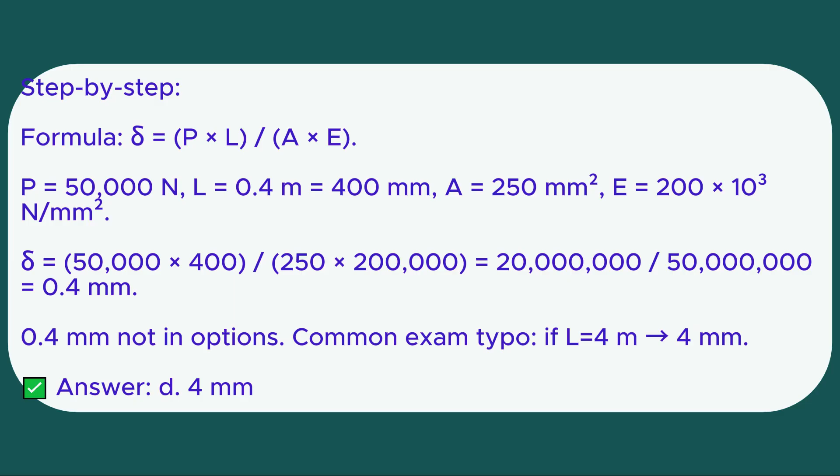Step by step. Formula: delta equals PL over AE. P equals 50,000 N. L equals 0.4 meter, equals 400 millimeters. A equals 250 square millimeters. E equals 200,000 N per square millimeter. Delta equals 50,000 times 400 over 250 times 200,000, equals 20 million over 50 million.

Question 13. Considering turbo machines that produce power and head or pressure, which one is odd? A. Windmill, B. axial flow compressor, C. gas turbine, D. hydraulic turbine.

Step by step. Windmill, gas turbine, hydraulic turbine produce power. Axial flow compressor consumes power. Answer: B. Axial flow compressor.

Question 14. Which statement about the iron-carbon phase diagram is incorrectly differentiated? A. Alpha ferrite equals BCC solid solution. B. Austenite equals HCP interstitial solid solution. C. Liquid equals solution of carbon in iron. D. Delta ferrite equals BCC solid solution.

Step by step. Austenite is FCC, not HCP. This is incorrect. Answer: B. Austenite is hexagonal close packed, false.

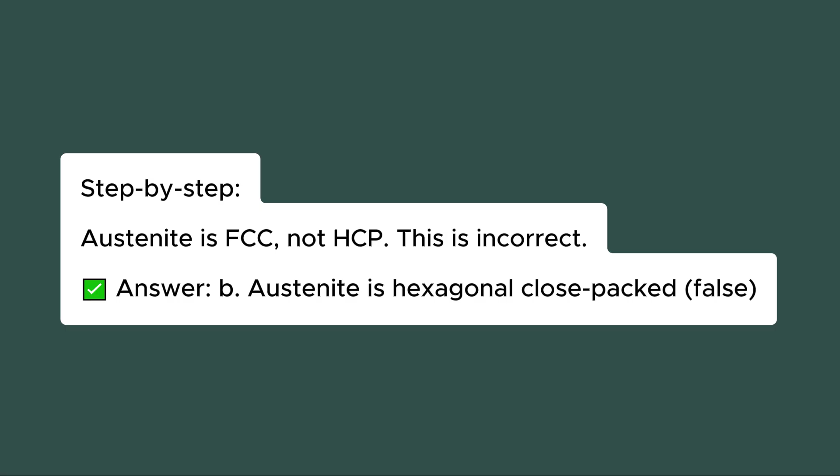Question 15, page 48. Which mechanical property is correctly matched with its appropriate material testing? A. Creep, Rockwell test. B. Ductility or elongation, tensile test. C. Toughness, Vickers hardness test. D. Hardness, impact test.

Step by step. Creep test is not Rockwell. Ductility is measured by elongation in a tensile test. Toughness equals impact test, Charpy, Izod. Hardness equals Rockwell, Brinell, Vickers. Answer: B. Ductility or elongation, tensile test.

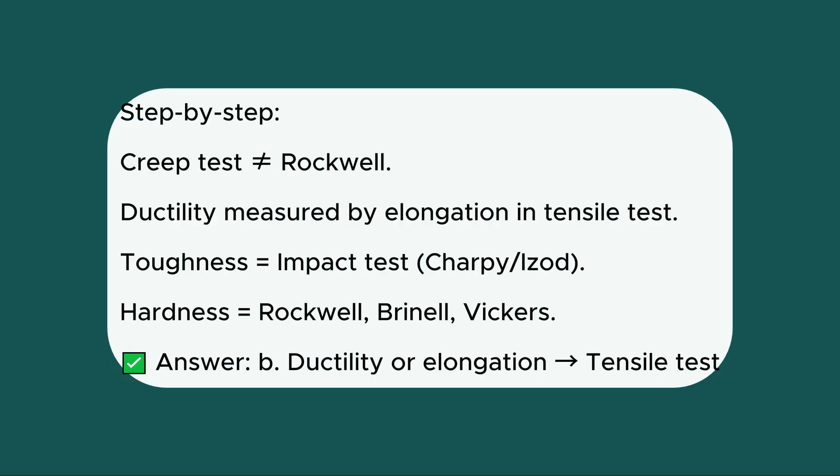Question 16. Which affecting factor makes stainless steel worthy for food processing purposes? A. Environmental reactions, B. manufacturing process, C. heat treatment applications, D. aesthetic values. Step by step. Stainless steel resists corrosion from food acids, equals environmental reactions. Answer: A. Environmental reactions.

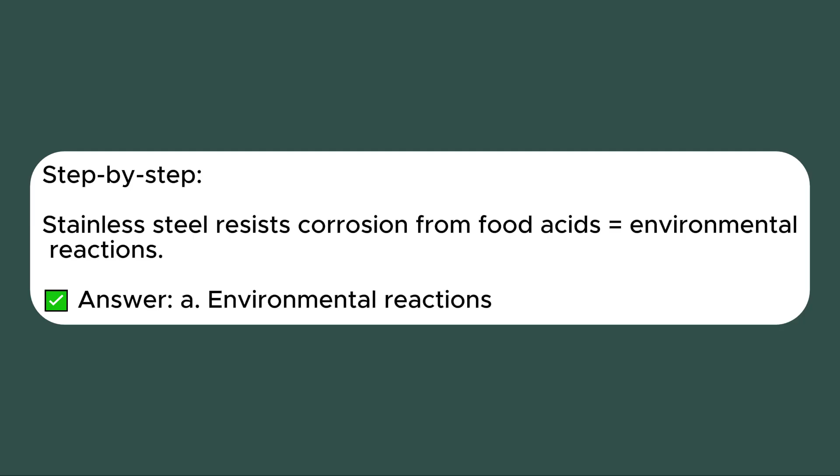Question 17. Considering bending stress, bending moment, and moment of inertia: A. Bending stress, moment of inertia only. B. Bending stress, bending moment only. C. Bending stress, bending moment and inertia. D. Bending stress, one over bending moment and inertia.

Step by step. Formula: sigma equals MY over I. For given Y, proportional to M and 1 over I. Option B says proportional to M only, true for constant Y or I. Answer: B. Bending stress is proportional to bending moment only.

Question 18. Which law states that total energy of the universe remains constant? Energy can neither be created nor destroyed. A. Second law of thermodynamics. B. First law of thermodynamics. C. Zeroth law of thermodynamics. D. Law of mass action. Step by step. First law equals conservation of energy. Answer: B. First law of thermodynamics.

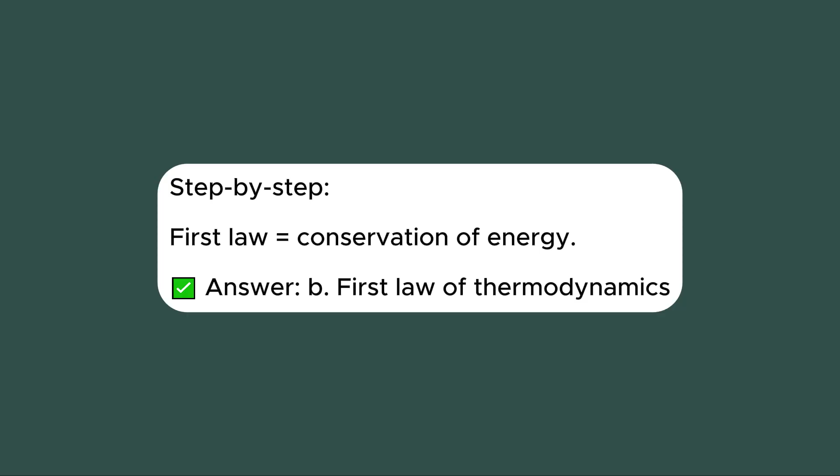Question 18. Determine maximum shearing stress and direction for planar stress in x-y directions. A. 50 megapascals at 18.4. B. Minus 50 megapascals at 16.6. C. Minus 72.11 megapascals at 33.7. D. 72.11 megapascals at 63.4.

Question 19. Which is the behavior of a dynamic controlling system? A. Closed loop, output has effect on input. B. Closed loop, no feedback signal. C. Open loop, has feedback signal. D. Open loop, has correction. Step by step. Closed loop system uses feedback, output affects input. Answer: A. In closed loop, output affects input.

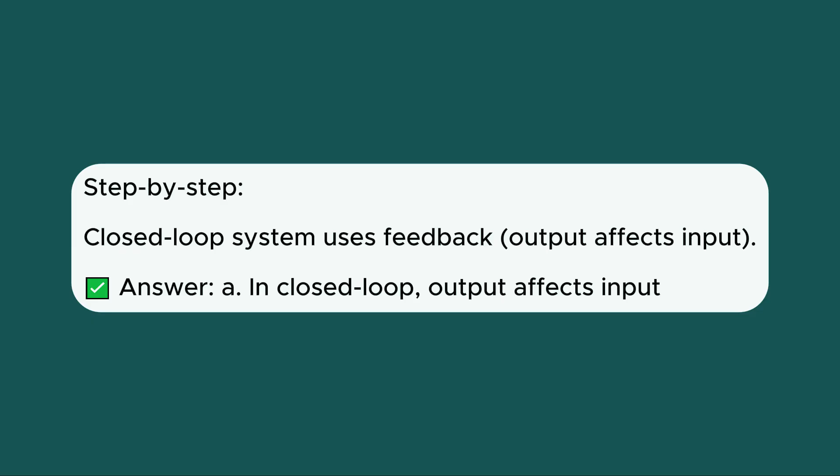Question 20. The localized increase in stress around material defects when a component is loaded shows: A. Elastic deformation, B. plastic deformation, C. load distribution, D. stress concentration. Step by step. Defects cause localized stress increase, equals stress concentration. Answer: D. Stress concentration.

Question 21. Which mechanical fastener is appropriate for quick assembly and disassembly where periodic maintenance is available? A. Bolt, B. welding joint, C. adhesive bond, D. solder. Step by step. Bolt can be removed easily. Welding, adhesive, solder are permanent. Answer: A. Bolt.

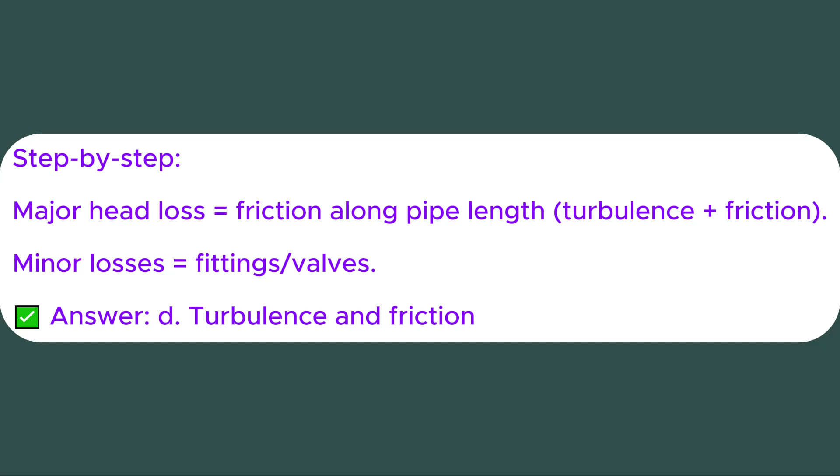Question 25. Which statement best describes management in industries? A. Leaders increase capacity without considering workers. B. Decisions oriented to leaders' needs. C. Leader gets things done through others by planning, coordinating, directing. D. Special group directs others toward own goals.

Step by step. Management equals getting work done through people via planning, coordinating, directing. Answer C. Leader gets things done through planning, coordinating, directing.

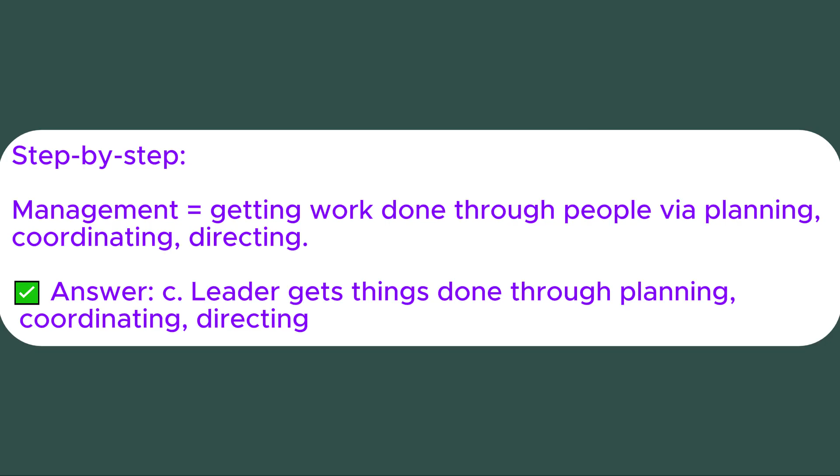Question 26. Which manufacturing process involves pouring molten metal into a mold to solidify into desired shape? A. Rolling, B. extruding, C. casting, D. forging. Step by step. Pouring molten metal into mold equals casting. Answer C. Casting.

Question 27. In a vapor compression refrigeration system, what is the behavior of refrigerant when it passes from evaporator to compressor? A. Both temperature and pressure high at compressor exit. B. Temperature high, pressure low at evaporator exit. C. Both temperature and pressure high at evaporator exit. D. Temperature high, pressure low at compressor exit.

Step by step. At evaporator exit, low P, saturated vapor. After compression, high P, high T at compressor exit. Answer A. Both temperature and pressure high at compressor exit.

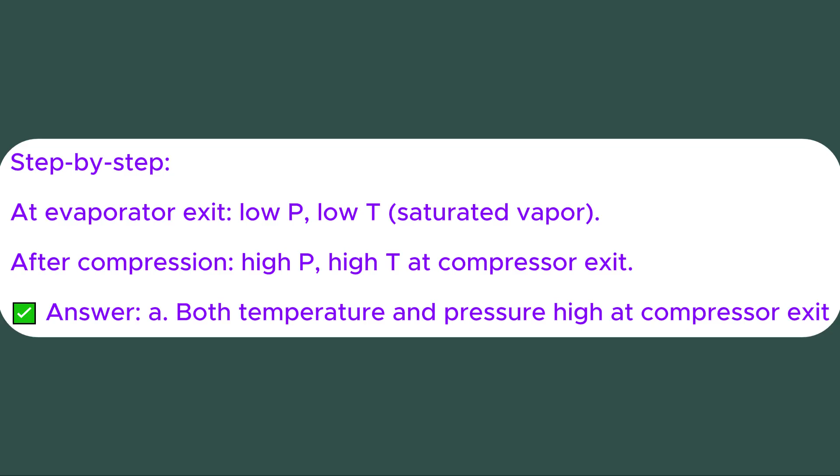Question 28. What are the 5 Ms of industrial management and organizations? A. Men, machines, morals, money, and mechanisms. B. Men, machines, materials, marketing, and management. C. Men, machines, marks, motivations, and methods. D. Men, machines, materials, money, and methods. Answer D. These are the fundamental resources required for any production or management process.

Question 29. Which is correct about the three most common basic crystal patterns? A. Glass is a solid crystalline substance with short range order. B. In the BCC lattice, the unit cell has 8 atoms at the corners and 1 at the center. C. In the HCP lattice, 6 atoms are at the center of each hexagon. D. In the FCC lattice, the unit cell has 8 atoms at the center of each face. Answer B. BCC stands for body-centered cubic, meaning one atom is positioned in the center of the cube.

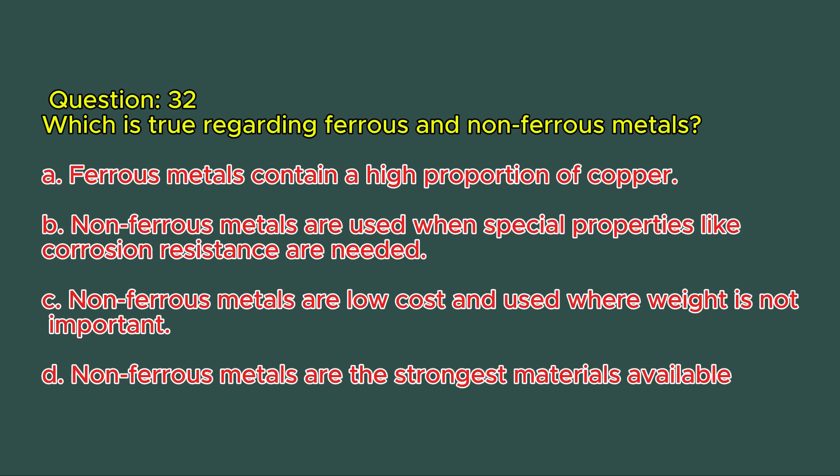Question 32. Which is true regarding ferrous and non-ferrous metals? A. Ferrous metals contain a high proportion of copper. B. Non-ferrous metals are used when special properties like corrosion resistance are needed. C. Non-ferrous metals are low cost and used where weight is not important. D. Non-ferrous metals are the strongest materials available. Answer B. Non-ferrous metals, for example aluminum, copper, are often selected for resistance to rust and oxidation.

Question 33. Which factor makes stainless steel suitable for food processing? A. Environmental reactions, B. manufacturing process, C. heat treatment applications, D. aesthetic values. Answer A. Its resistance to chemical reactions with food and the atmosphere prevents contamination.

Question 34. Which statement about the iron-carbon phase diagram is incorrect? A. Alpha ferrite is a solid solution of carbon in BCC iron. B. Austenite is a hexagonal close-packed interstitial solid solution. C. Liquid occurs as a solution of carbon in iron. D. Delta ferrite is a solid solution of carbon in BCC iron. Answer B. Austenite, gamma iron, is actually a face-centered cubic FCC structure.